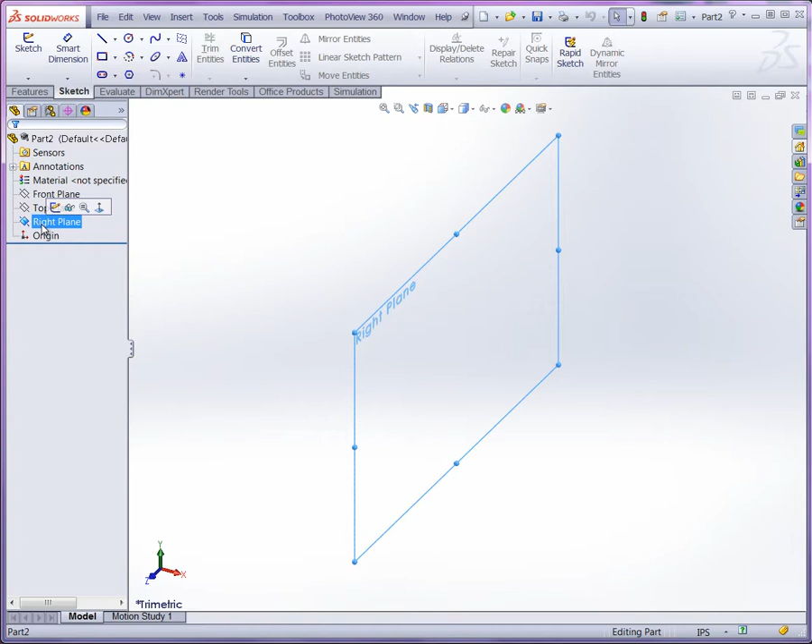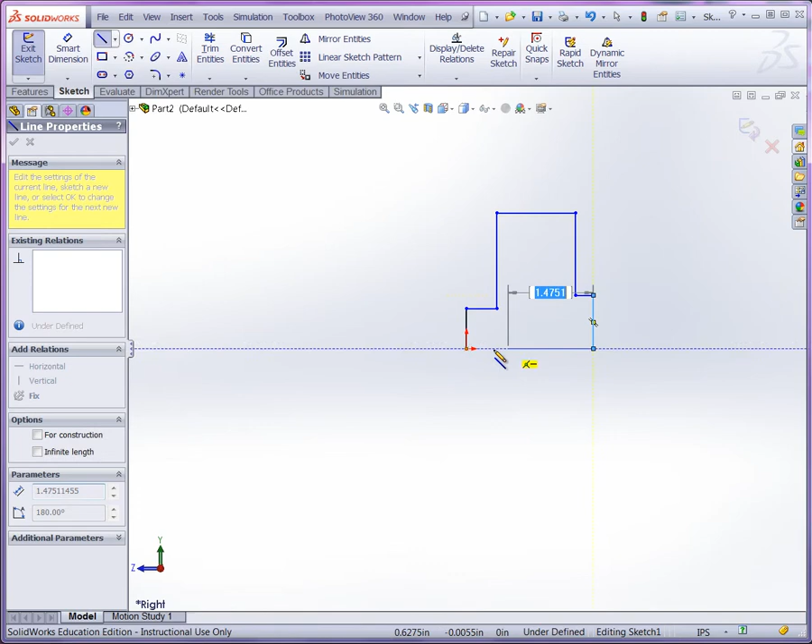Let's start by selecting the right plane and creating a sketch. We're going to use the origin here as the bottom front face reference. So let's go ahead and sketch out our rough profile. I'm just going to sketch something here and then come back and use our smart dimensions. So we'll close that up there.

So we're going to start with the overall height. We'll set that to 2.05. Now we'll set the width of the top here, the movable jaw, to 1.250.

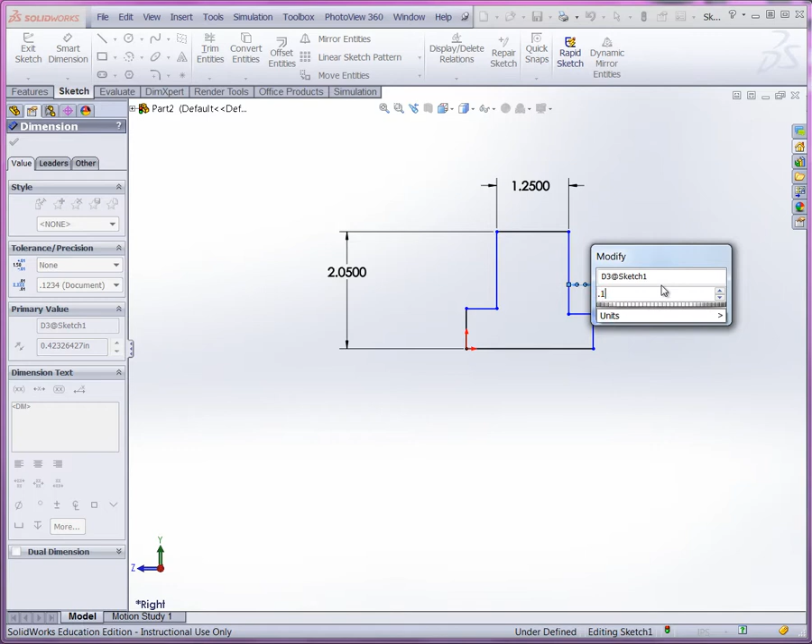Then we'll set our setback from the back face here to 0.150. And we've got a height from the top here to the back end here at 1.50.

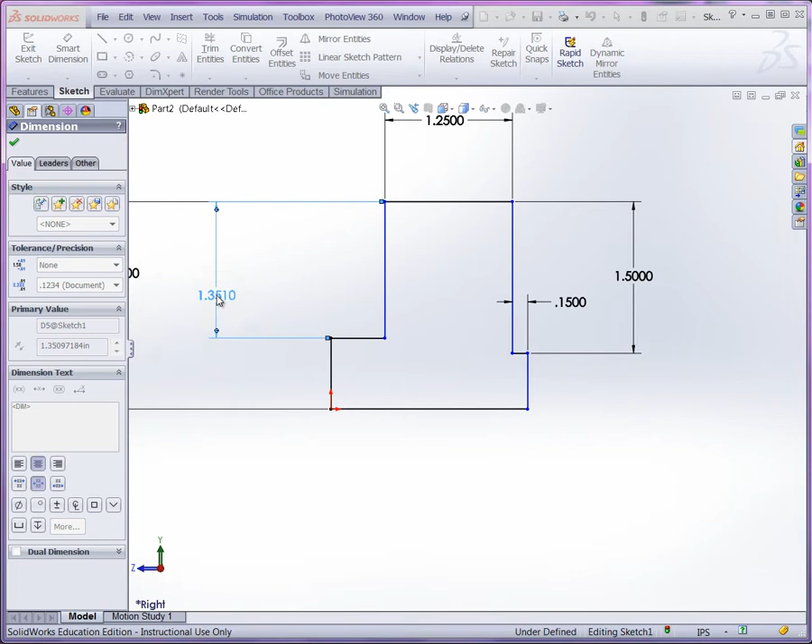And in the front we'll set our height to 1.60. Also, we want to set this setback of the front face to 0.650.

Okay, we've got a fully defined sketch, and again, this is just a rough profile of our base extrusion. Let's go ahead and do that, and then we'll continue with some additional features.

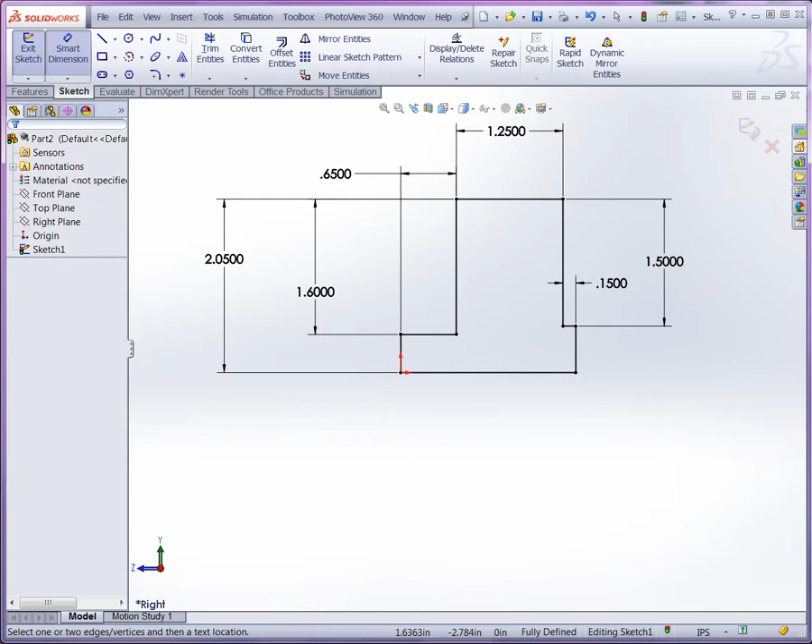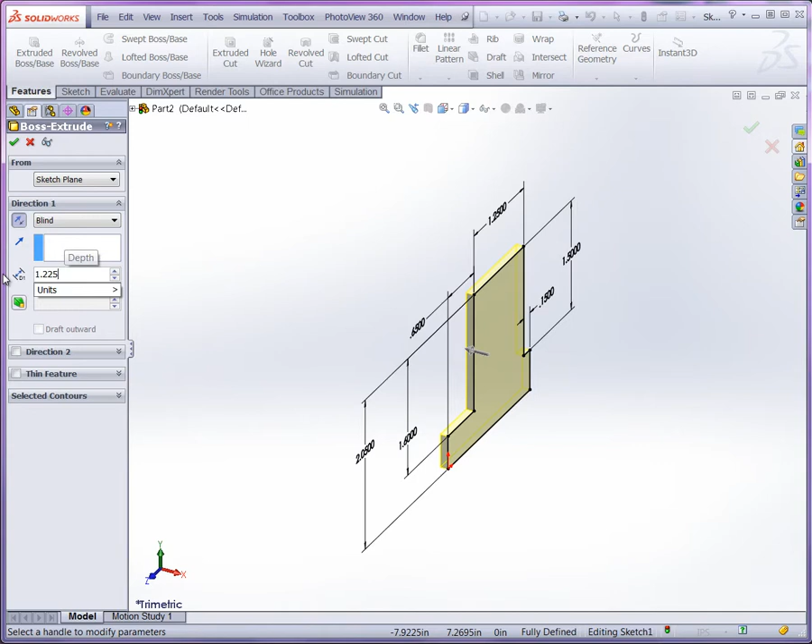So I'll switch now to features, and we're going to do an extruded boss. Again, since we're only doing half of our body, I'm going to extrude this in the other direction, and we're going to do half the width of the movable jaw, which is 1.225. So you can see here we're using the origin, and we'll be able to use the right plane when we're almost done here to mirror the body and complete the full width of the movable jaw.

Now we're going to have to remove some material from this bottom left hand corner area, so let's go ahead and prepare a sketch for that. Let's select the face here and create a new sketch. We're going to use this bottom left hand corner as our starting point, and we'll just create a rectangular sketch here.

And we're going to make it such that we use a little bit more material to cut away from this side of the part so that we can get that clearance as we go over the main body.

And we're going to set this height to 0.550, and we'll provide a total width of 0.775.

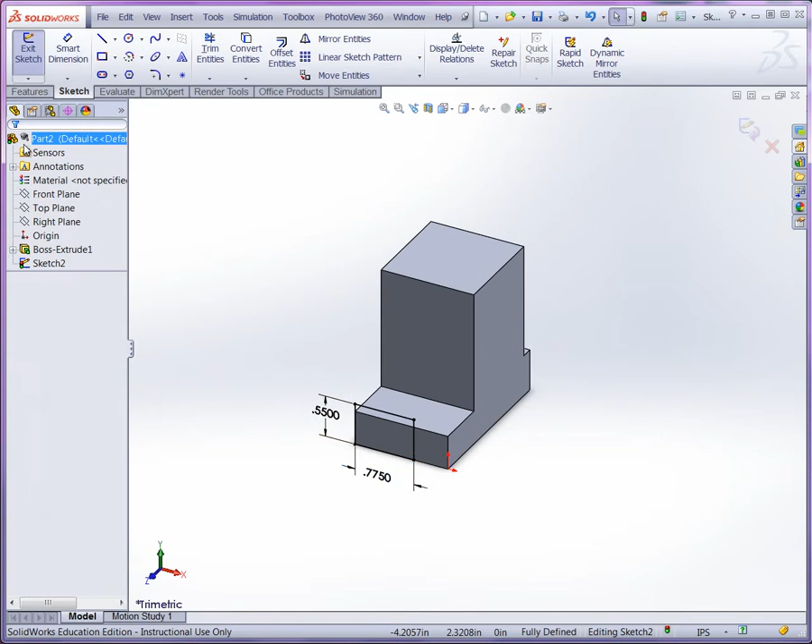And now we'll be able to go ahead and use our extrude cut feature, and we'll go through all. So you can see through the whole backside there.

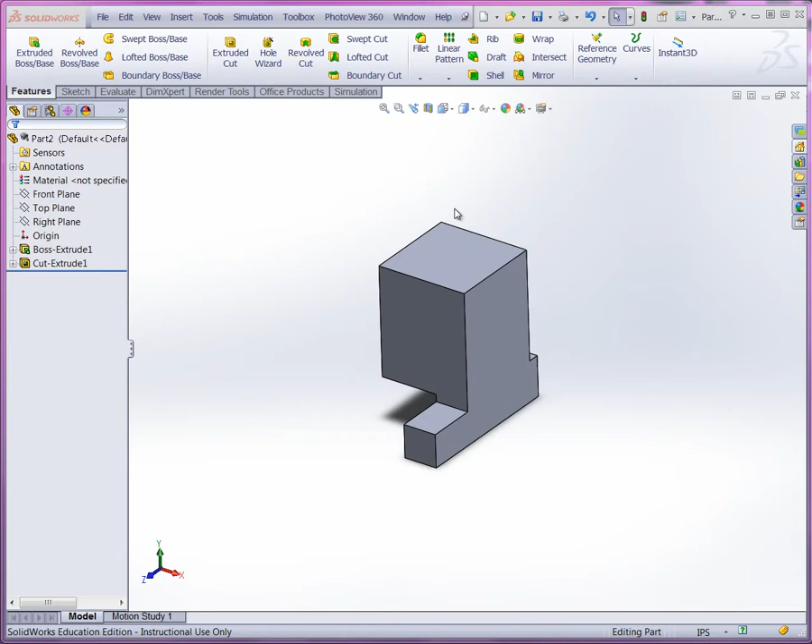So the next thing we want to do is work on this top half of the movable jaw. We want to set up a profile to cut extrude into this face to produce the sides of our movable jaw, or at least part of it.

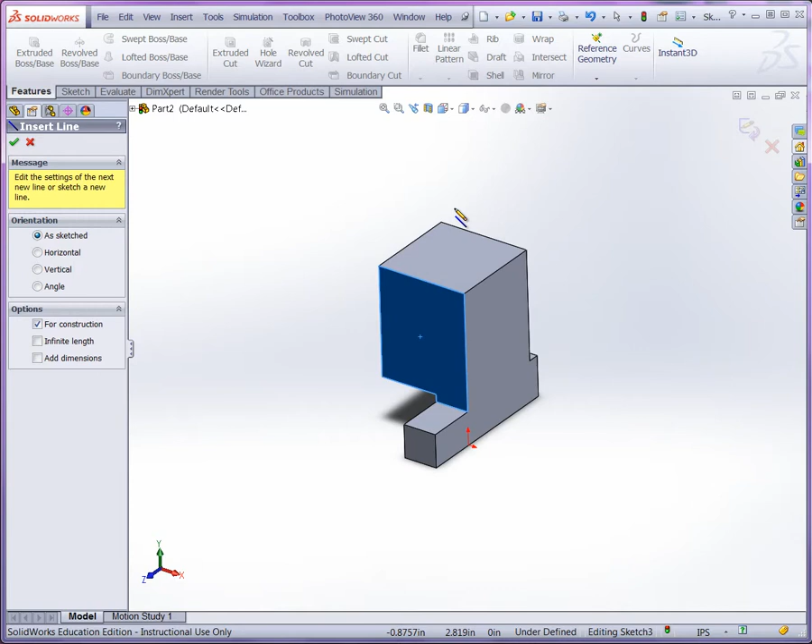So let's go ahead and select the front face here, create a sketch. Now before we continue, I'm going to set up a center line, a vertical center line here, and this will mark the center line for the arc we're going to use here to cut into this surface.

So we'll go ahead and use our smart dimension to set it. We'll set that at 0.445.

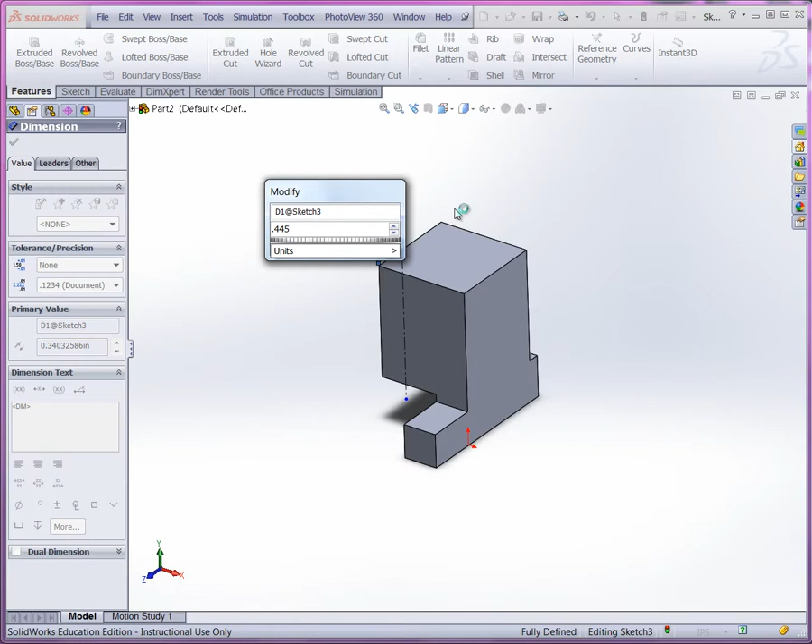Now we can go ahead and continue with the rest of our sketch work, and what we'll do here is start at the top edge and come down. We've got this side here. We'll come across and simply trace the corner here.

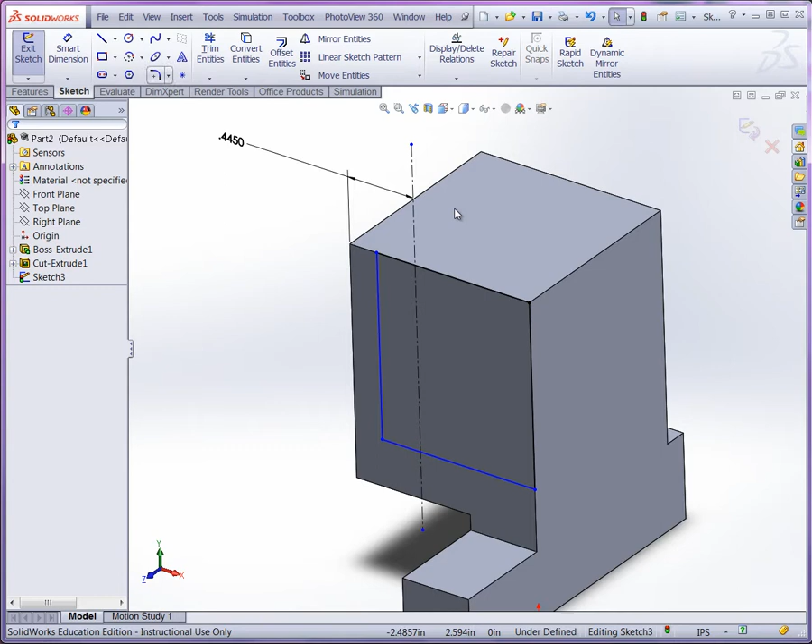Now I'll go ahead and put in a fillet radius, and we'll use a fillet radius of 0.40. We'll fillet between these two lines here.

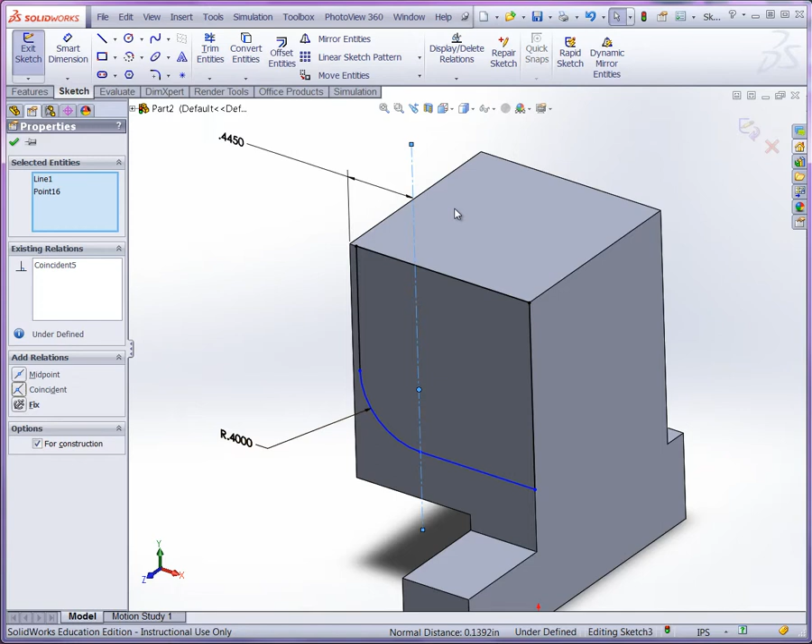Now we also have to locate this along this center line. So what we'll do is select the center and then control-click this line here, and we'll create a coincident relation. Alright, now again, as we continue here, we need to be able to show the overall width here of our edges.

So before we continue here, let's change this dimension actually to a diameter dimension, and that again should be 0.40.

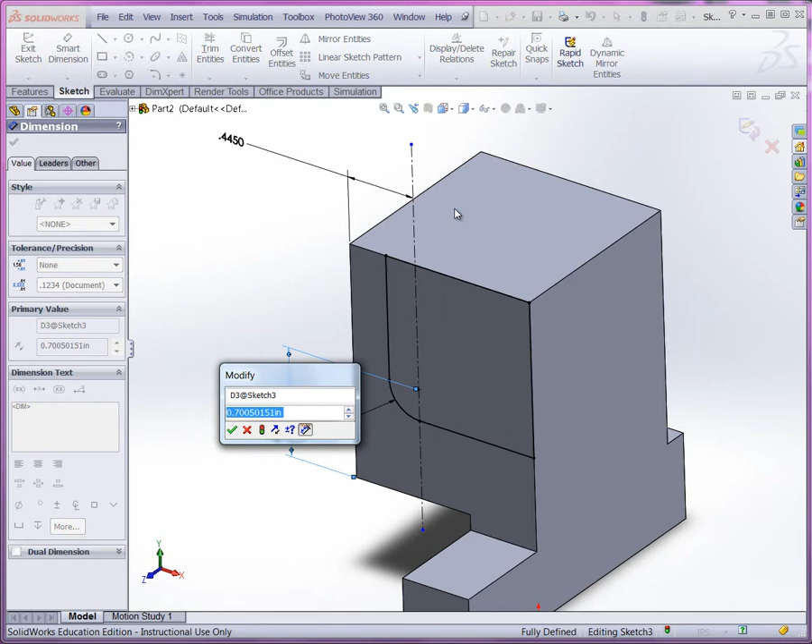There we go. And since we placed it horizontally, now let's place it vertically. So we'll go ahead and use a smart dimension again, select that center, and then select the bottom edge here and place a dimension, and we'll set that to 0.400.

Okay, so we've got our radius dimension, we've got our dimensions for the positioning. Okay, and now all we got to do is go ahead and produce our cut extrude.

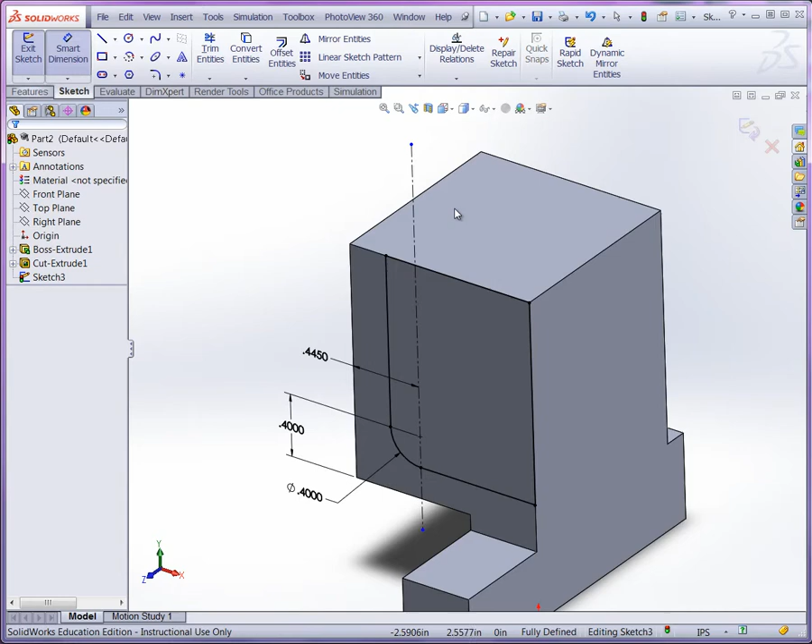So we're going to cut into this face about 0.750 to get the rough body profile there. So let's go ahead and do that. Let's go to features here, and we'll use extrude cut. We'll set that to 0.750.

There we go. Now we're going to be able to create the middle part here as a loft. We'll go ahead and see how we're going to produce that in just a moment.

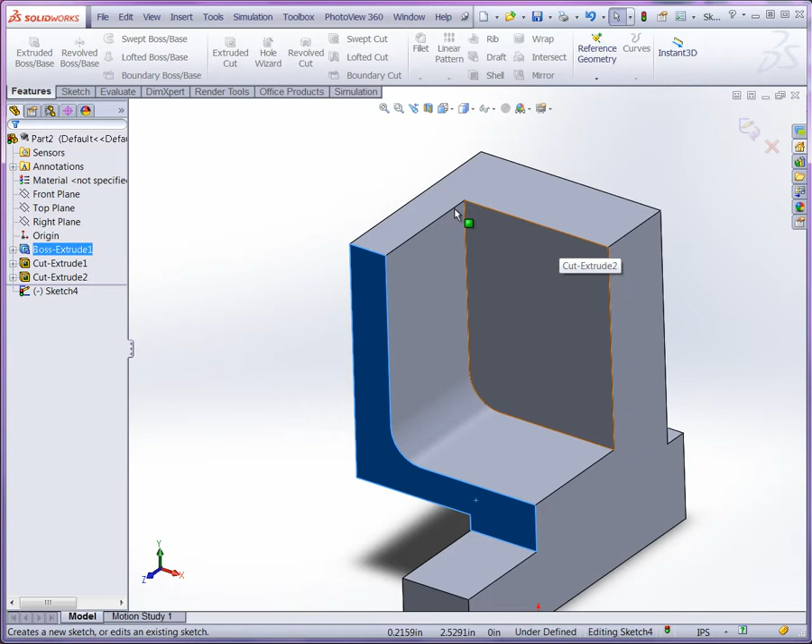So we'll start this by selecting the front face here and creating a new sketch. The next thing we want to do is create the other half of the radius profile here that will angle and blend with the other top radius profile, and then loft toward this offset back face.

The way we're going to do this is, first let's create a couple of sketch lines here from the back face, using convert entities. So we got part of it right there. Next, we'll create a circle based on the center point here with the same dimension, so it's 0.4.

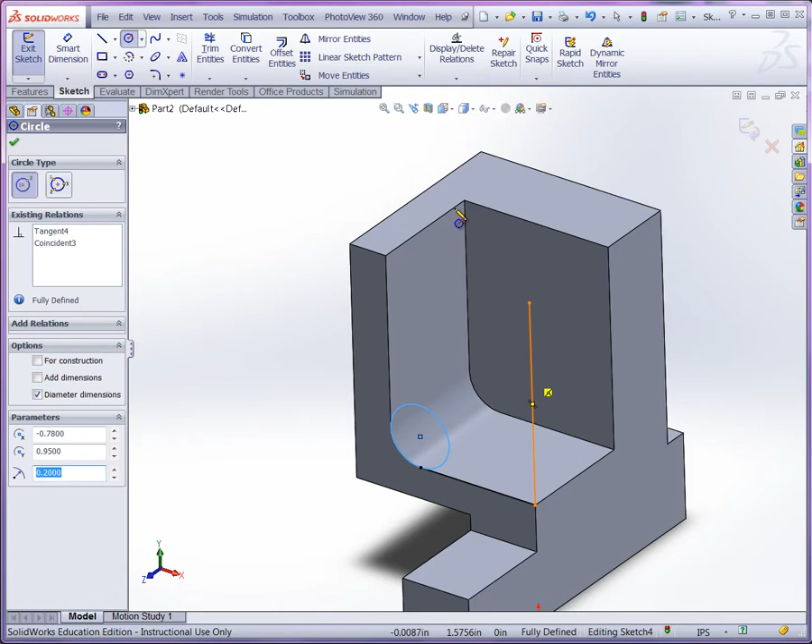Then we'll set another sketch circle along this edge here, and set that one to 0.90 diameter. We'll set its position vertically from this edge to its center at 0.60.

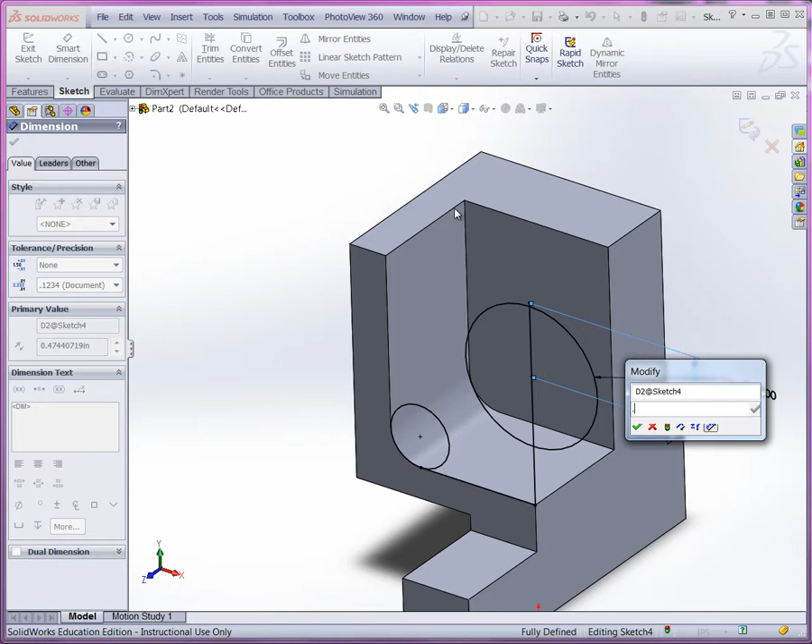Now the next thing we'll do here is trim up our line work and close our profile. We'll do that with a straight edge here.

Since these two circles are already positioned, we'll control click this edge and then control click the circle, make a tangent, deselect, control click again, control click the circle, and then finish with tangency there. Now we can clean up all of our line work.

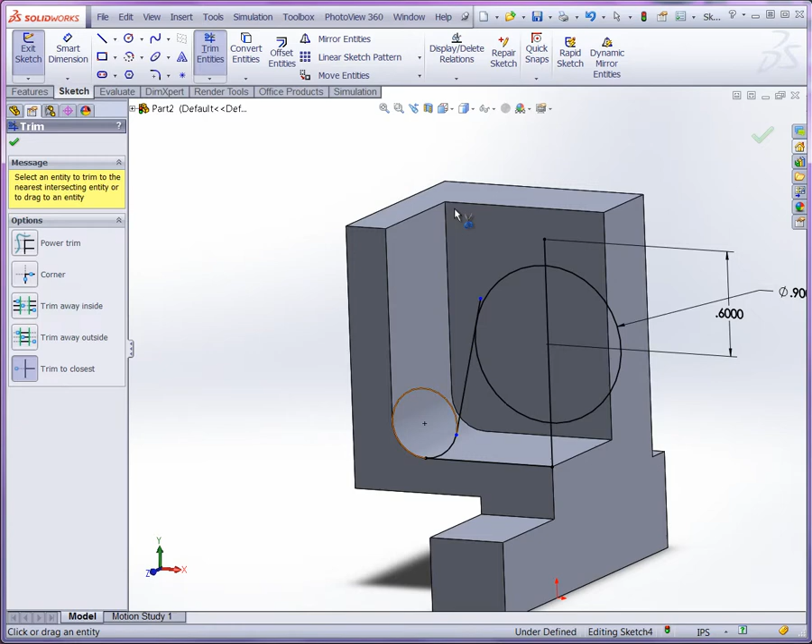We're going to use trim here and make sure we clean up the line work on this edge too. We don't want any extra extensions. Okay, there we go, there's our profile.

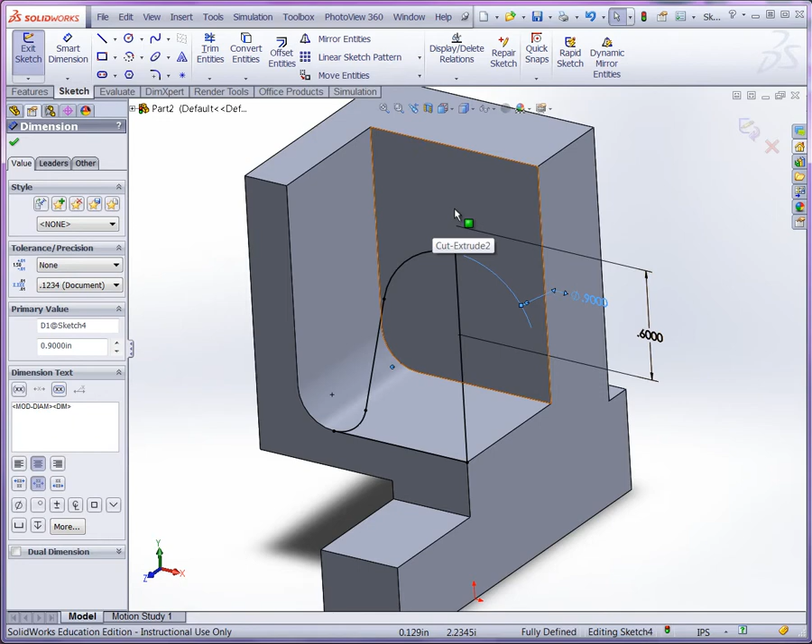This is our first profile that we're going to use for our loft, and we're going to blend this with a profile that we're going to locate on this face. So let's close that sketch and start with the next one, selecting this face and creating a sketch.

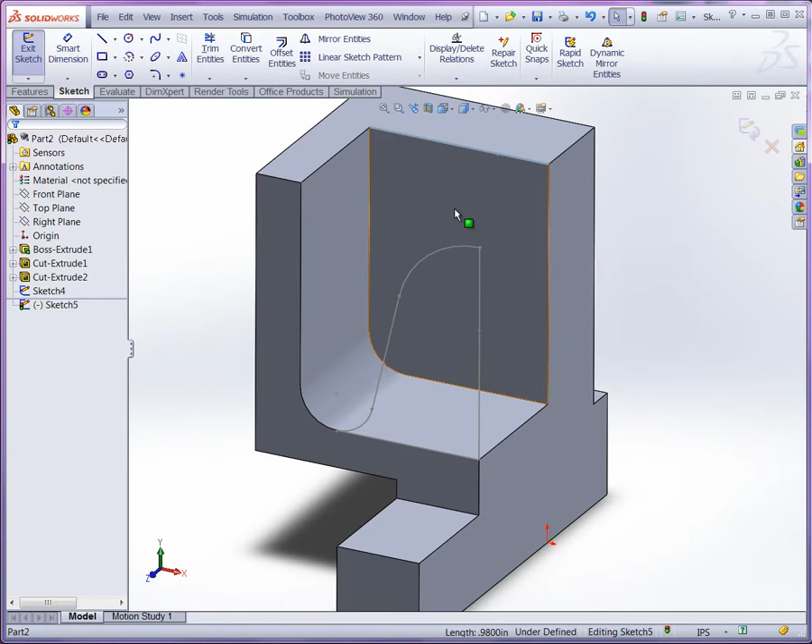Now we're going to blend part of this profile into this face. One way to do that is to reuse these edges, so control select the edges and convert entities.

Now what we'll be able to do is project this sketch arc here and this sketch edge here onto the back face in our current sketch, using convert entities once again.

Now all we have to do here is extend this edge, and this is the place where it's going to blend in - our loft is going to blend in with this back face here. So now we can clean this side up too.

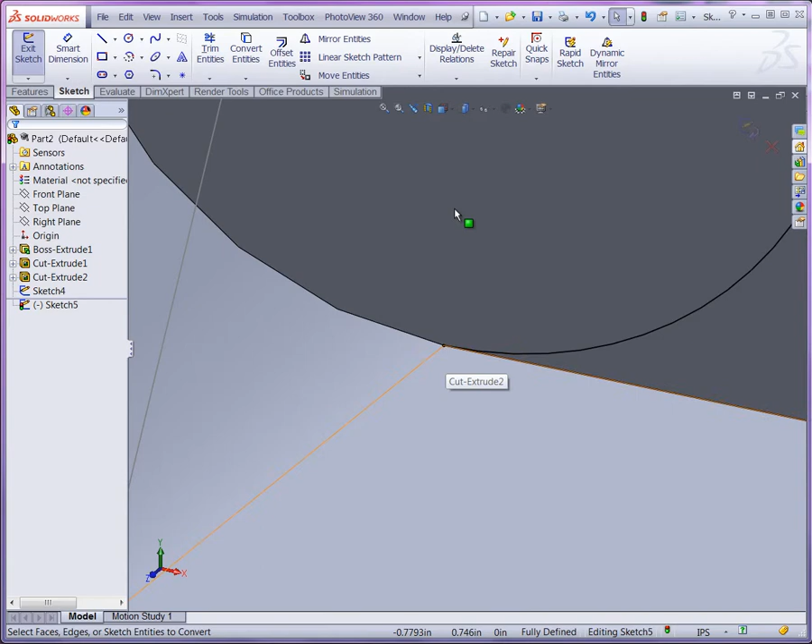So we have our top edge, our side edge here, the bottom edge, which again we can use convert entities, and that should complete our profile. Let's double check to make sure we have no extensions there. So we reused a couple of these edges and projected them onto this face in a new sketch.

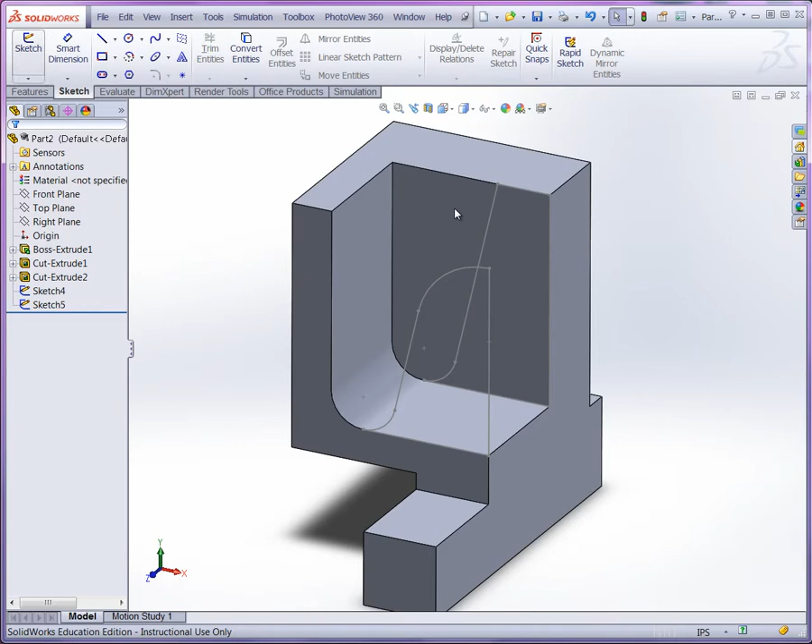Now we'll be able to create this form with loft. Let's close the sketch, go to features, and start with lofted boss base. We'll start with the front, and the next sketch to loft to will be the one in the back. As you can see, there's our form - exactly what we're looking for - and we'll go ahead and accept.

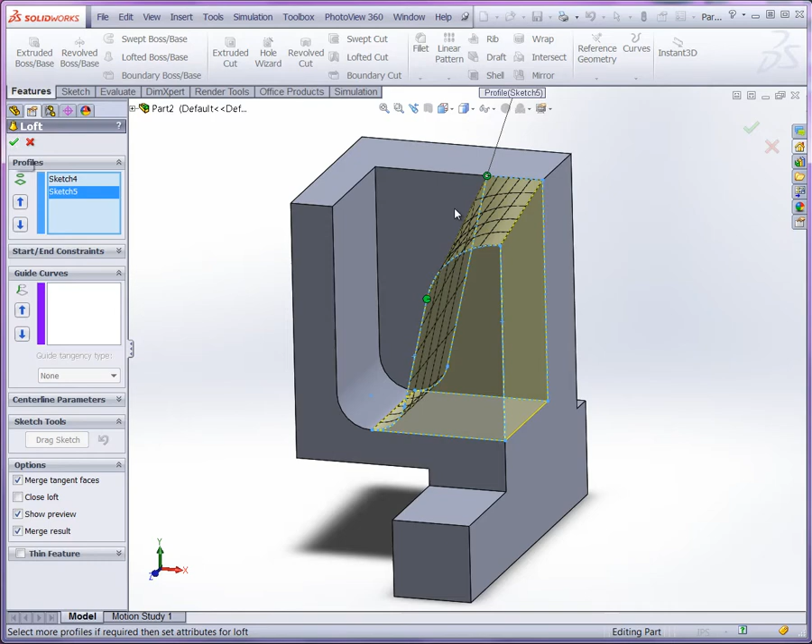And now there's our surface. Alright, let's continue with the next feature.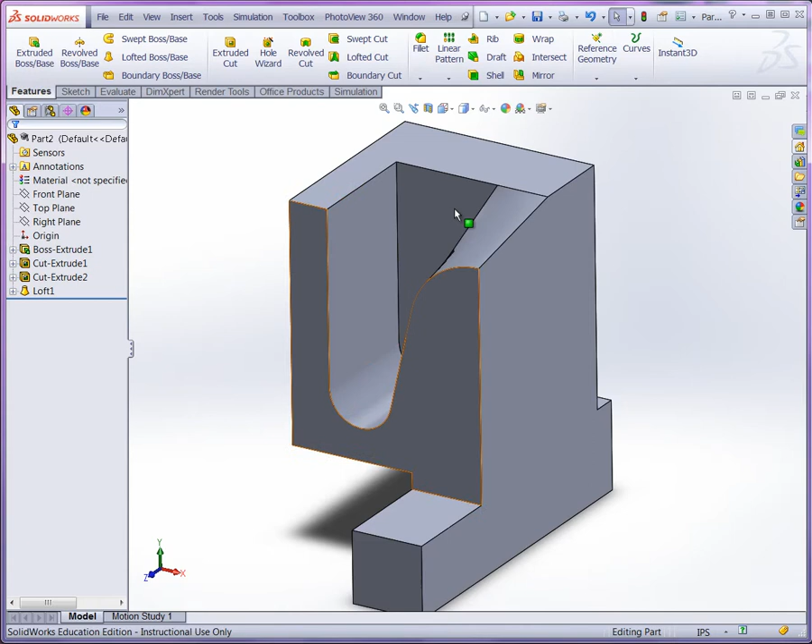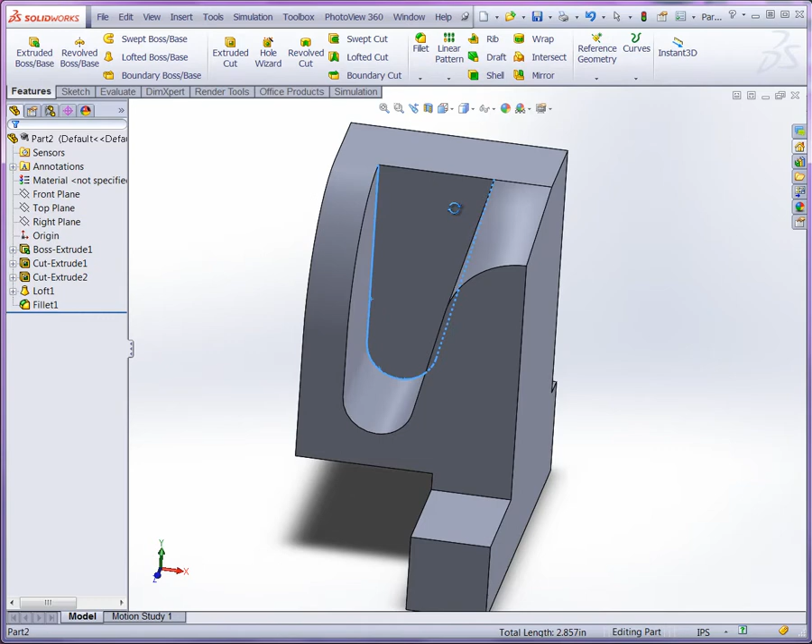Now we're going to take a look at this edge here and the inside edge of our cut extrude with loft feature. Let's start with this edge and use a 0.750 continuous radius, then come into this face and use control click to select each of those edges, and use fillet there as well.

And we're going to have a 0.050 continuous radius. Alright, that's really coming together now.

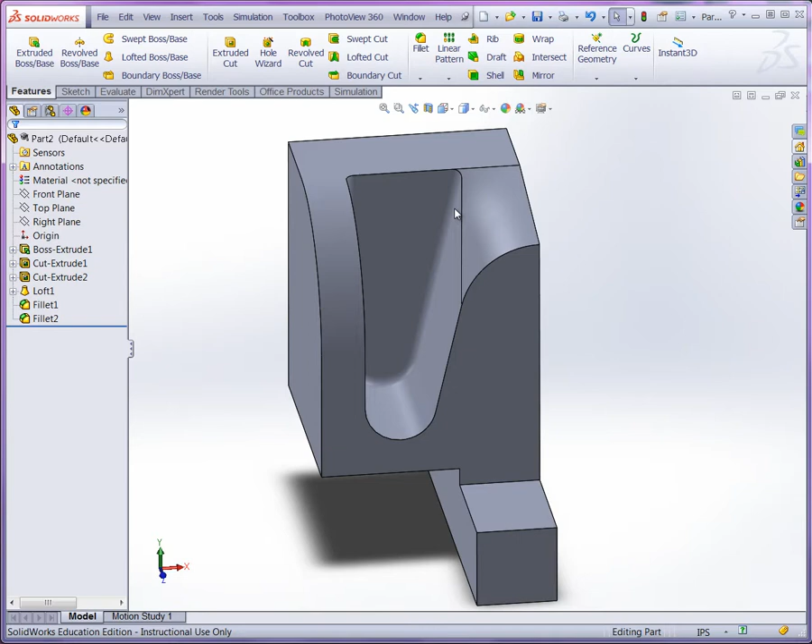Now all we need to do to complete the part is add our holes, but before we do that, let's mirror the main body. So let's start with the right plane, then control click in the design tree all of our features including the fillets, and use mirror.

Make sure that we've got all our features there. And now we've got the full width of our movable jaw.

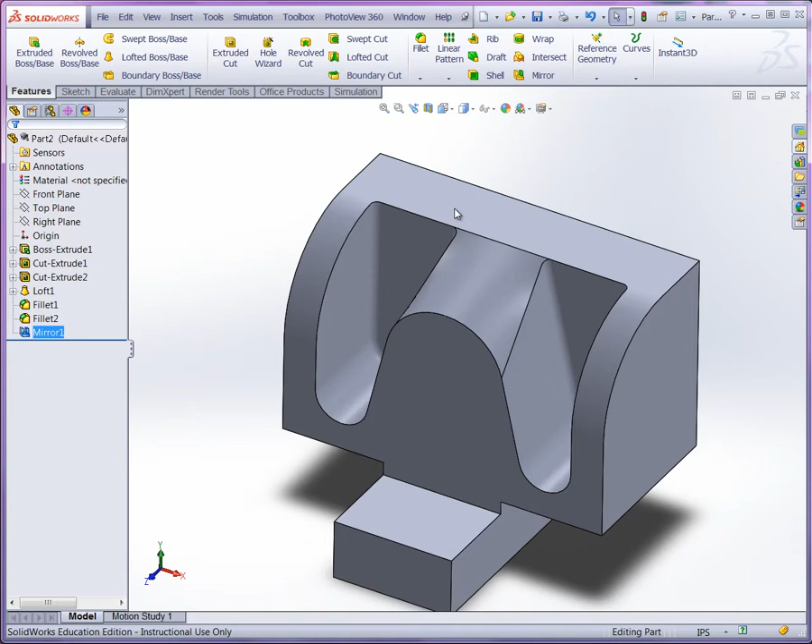So the next thing we want to do is add the sketch circles for our holes. This will make it easier to locate our holes with the hole wizard. First, let's start with the holes on this offset face. Let's select this face, create a new sketch, and if you like, get normal to it.

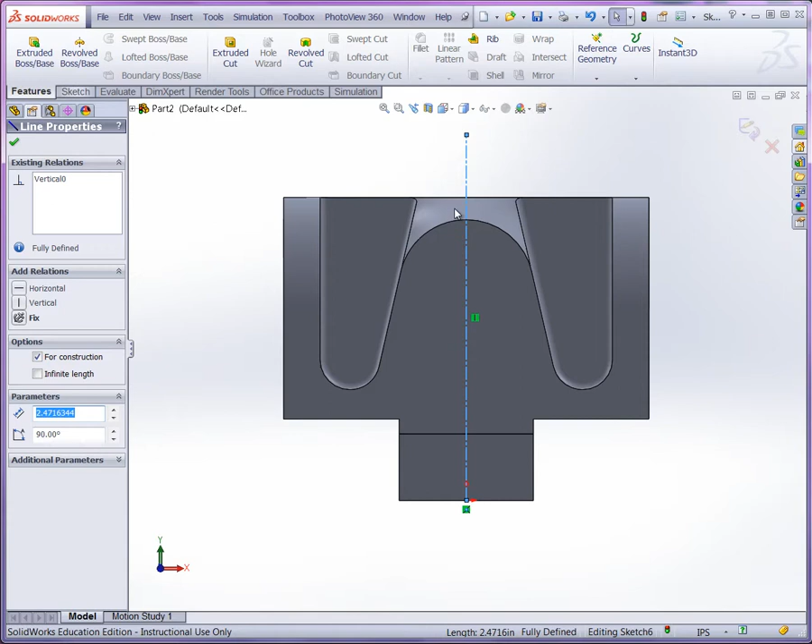We could start with a center line from the origin, and activate our dynamic mirror. Now we'll start with a circle, and use some smart dimensions here, setting the diameter to 0.200.

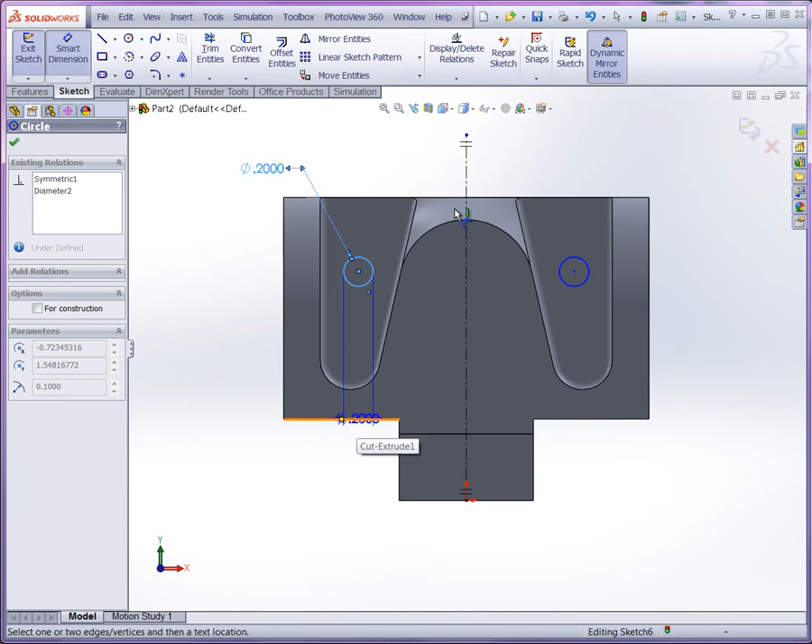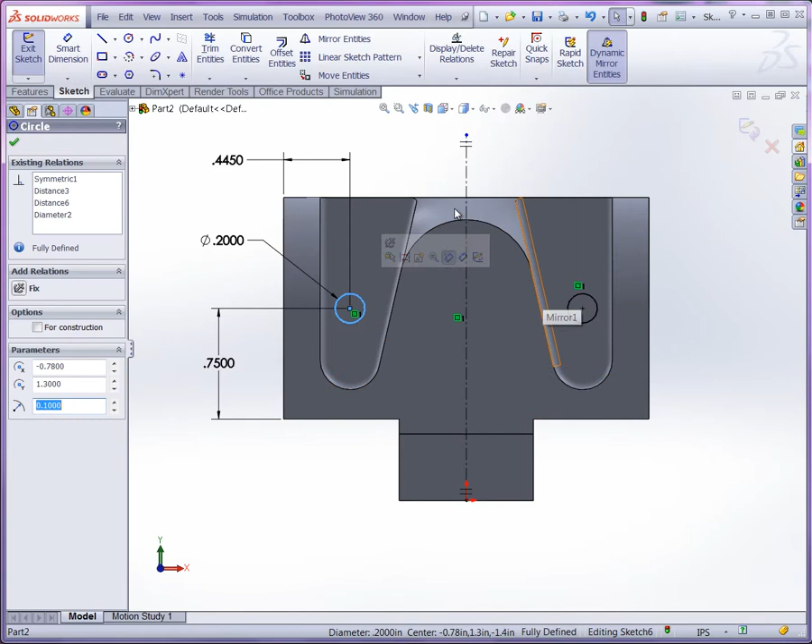Then we'll position it from the bottom of this face at 0.750, and from the edge here to the center we'll set that at 0.445. Now we're going to use these circles not for a feature, so let's select them - we'll just use them for reference. This will be for our offset face holes.

Alright, let's close this sketch, and now let's take a look at the sketch we'll use for the hole at the top of this face. I'm going to select this face and create a new sketch.

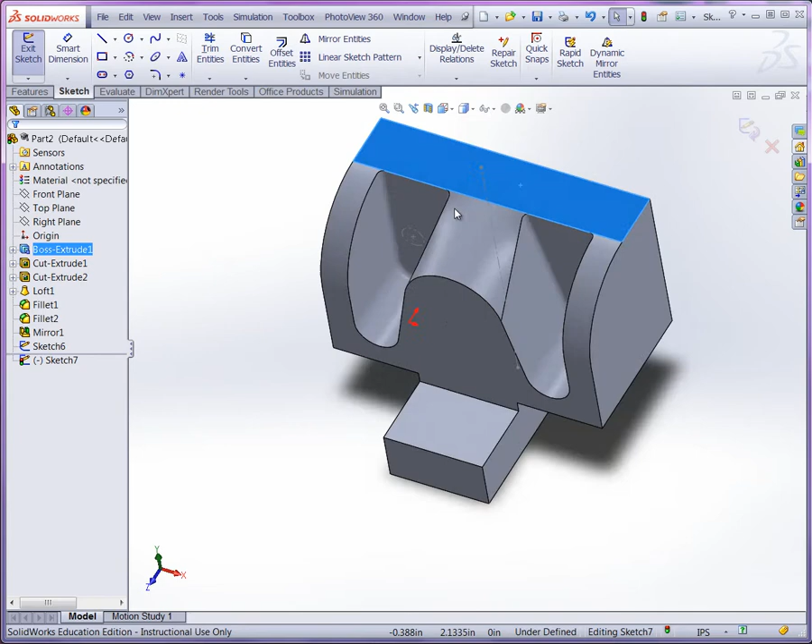If I look at it from the top here, what I'll want to do is create a center line from the origin vertically, and then use a sketch circle coincident with the line, setting the dimension for that circle to 0.250.

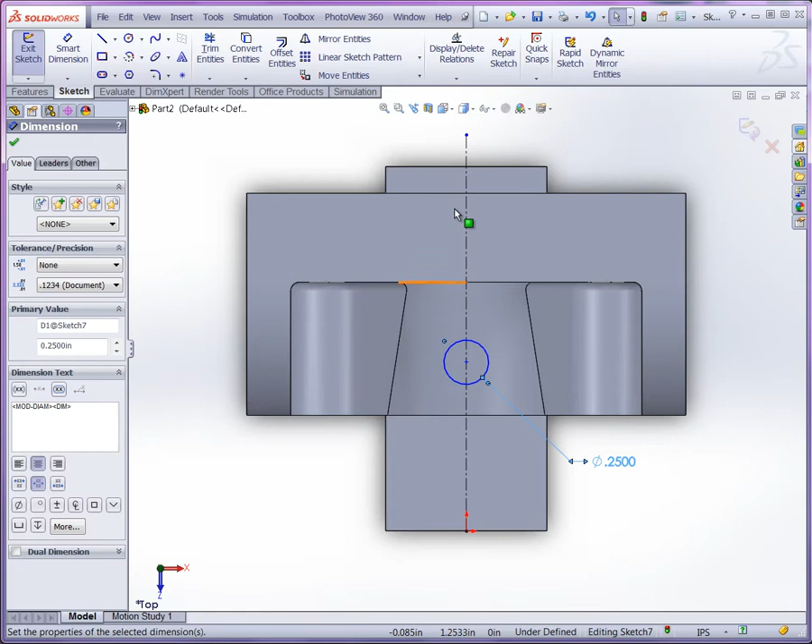And the position for that from the back face here to there, we'll set it at 0.820. And once again, we want to make that for construction only.

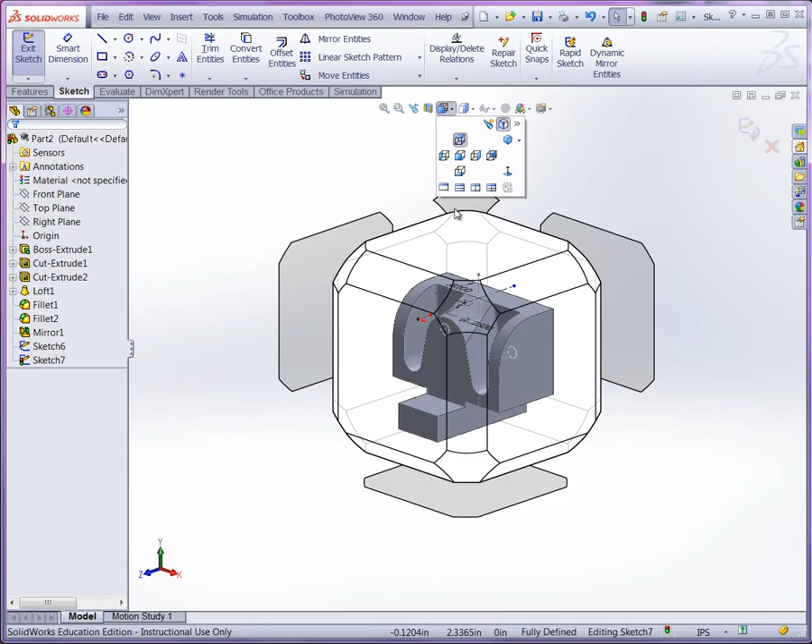Okay, now lastly we can look down here on the bottom of this base, and we're going to set the two sketch circles here for our hole wizard holes. So select the face, create a new sketch.

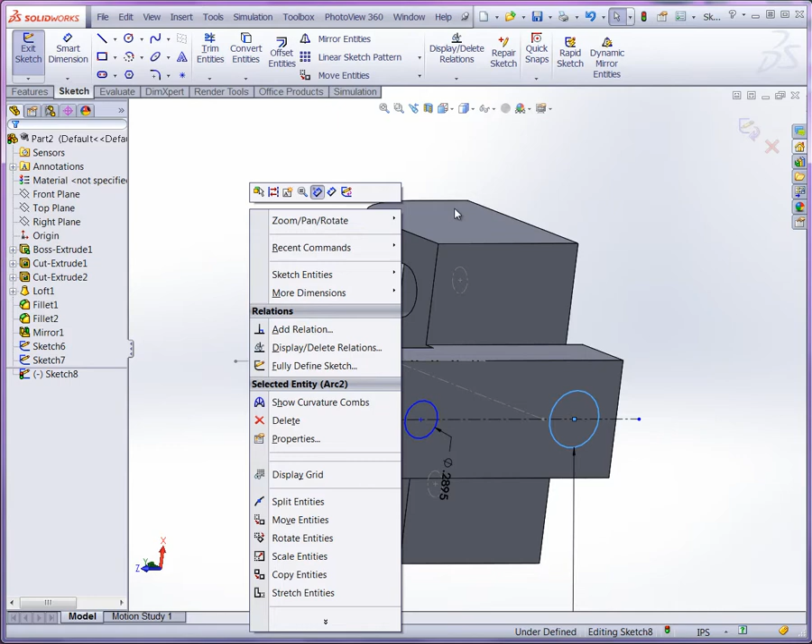Once again, use the center line starting at the origin there. We'll set up two sketch circles the same size, so I'll just sketch two here, and we'll select both of them, control click both of them, make them equal. Sorry, let's get rid of one of those dimensions. There we go. And let's get into a normal view. There we are.

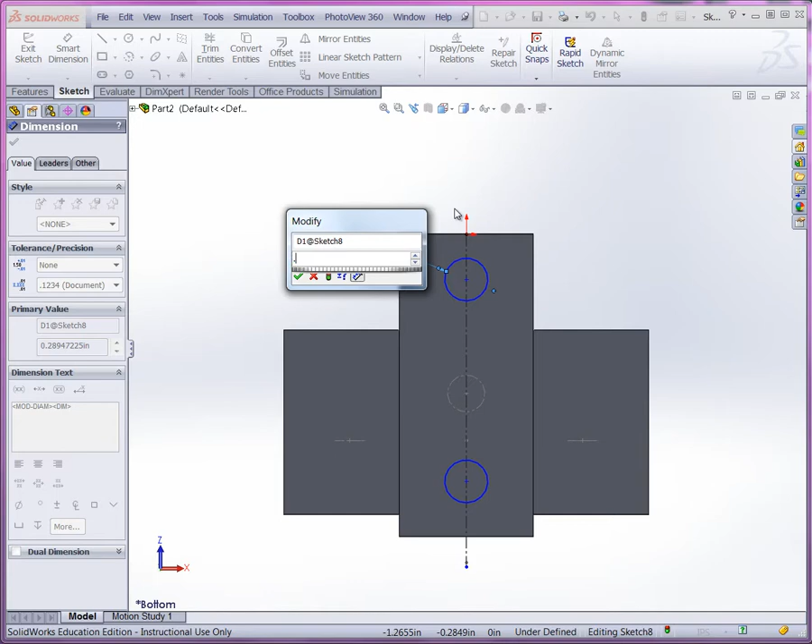Okay, we'll make this 0.250, and once again we'll select both of them, control click here, make them for construction, and then also let's set their distance from each side to 0.30.

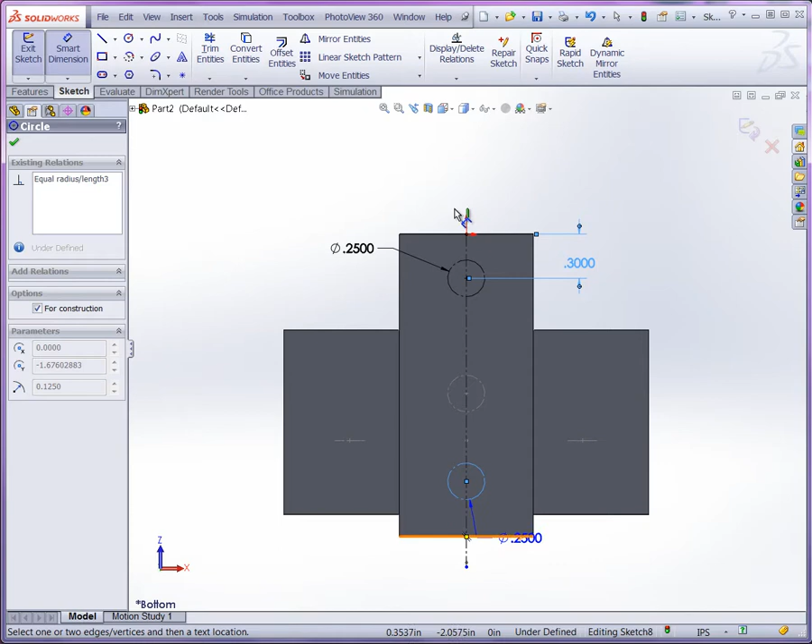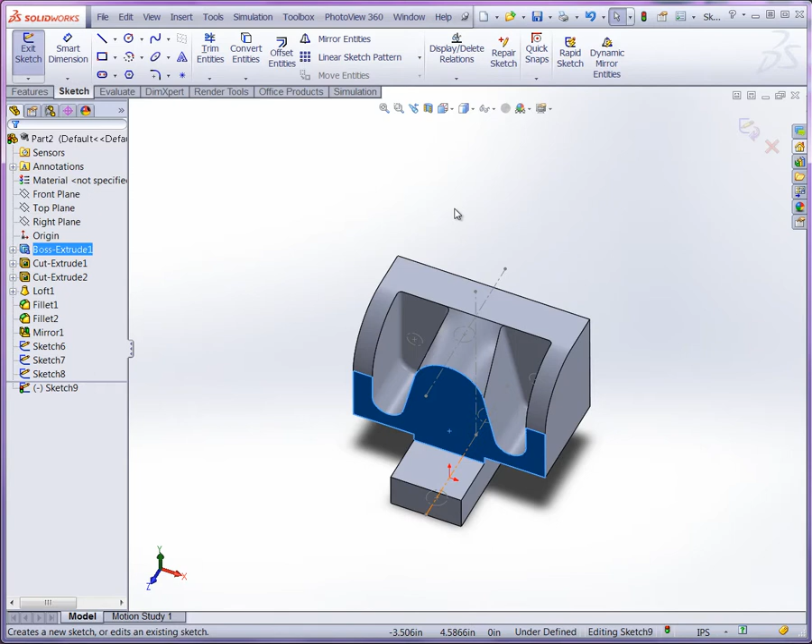Okay, so we've got all our sketch holes here, and now we're ready to create our holes. We have one more actually. We have one here on this face, so let's select this face, we'll create a sketch. Once again using the center line starting from the origin, making it vertical, and then starting with a circle somewhere here.

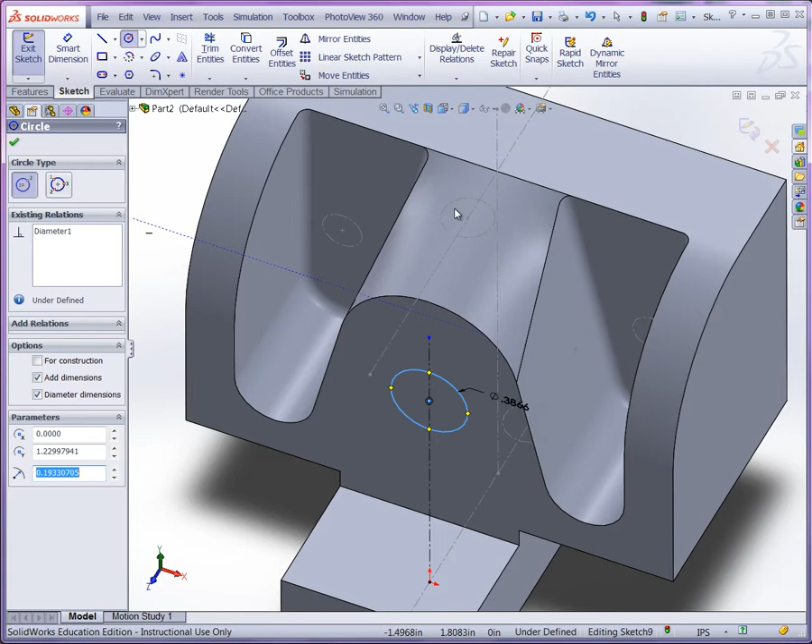Now actually, because it is concentric with our previous sketch circles, let's see if we can do that. So I'll control click the edge here, and we can make it concentric with the center point of our new sketch circle here. And we'll make this 0.400.

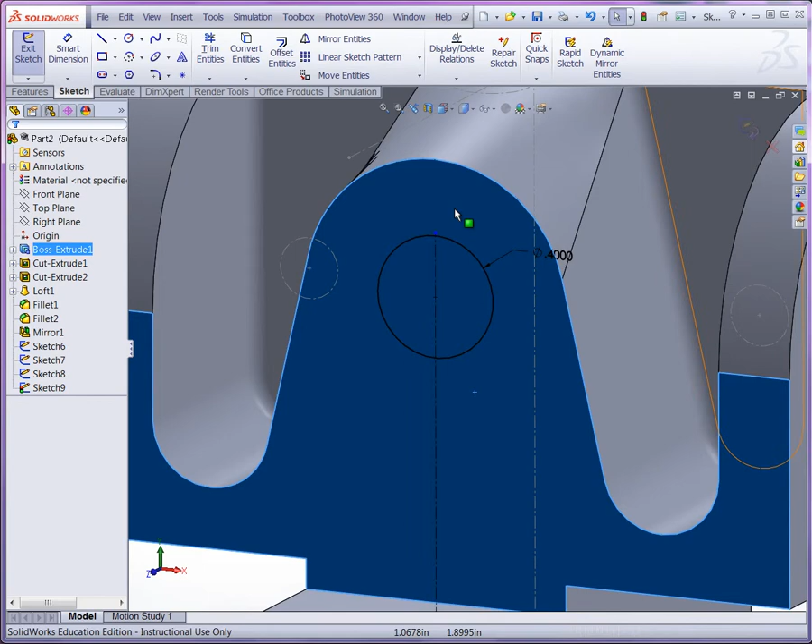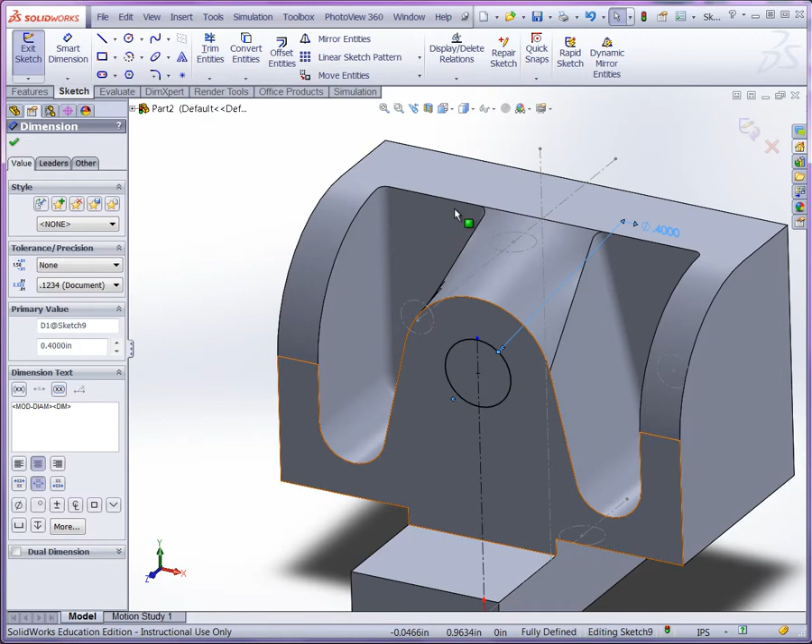Okay, so we can start with this hole here, since we're only going to make a cut extrude hole. This will be where the end of the screw fits into. So why don't we go ahead and start with this hole here and use our cut extrude, which will go into the part at 0.830 depth. Okay. There we are.

Now, using the remainder of the sketches, we'll go ahead and put in our hole wizard holes. So let's continue with the hole wizard, and we'll start with our top hole here. Let's go ahead and enter the hole wizard. We're going to start with a straight tap, bottoming tapped hole, and we're going to select 10-32 as our size. Now, our blind depth here is going to be at 4.474. We're going to show our cosmetic thread, include the thread callout, and we'll use a 2B thread class.

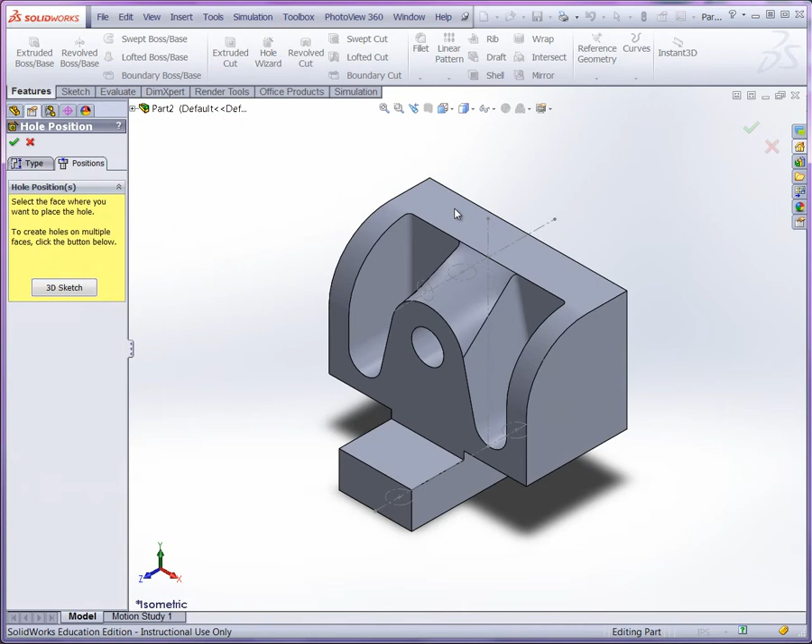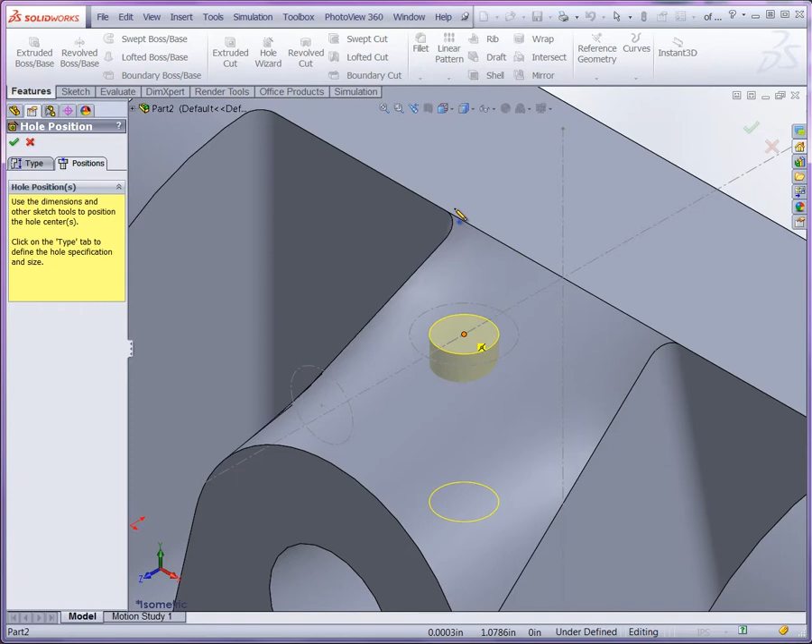Alright, let's go to positions. And now, as you zoom in here, I want you to select the top face here, or the boss extrude. Then we're going to use our sketch circle here to place it. Now you'll notice that what's happening here is that it's oriented to the top face of that extrude, and it'll drill straight down using this center mark or the center point as a reference. So let's go ahead and snap to it, and then just click OK, and then you should have your hole.

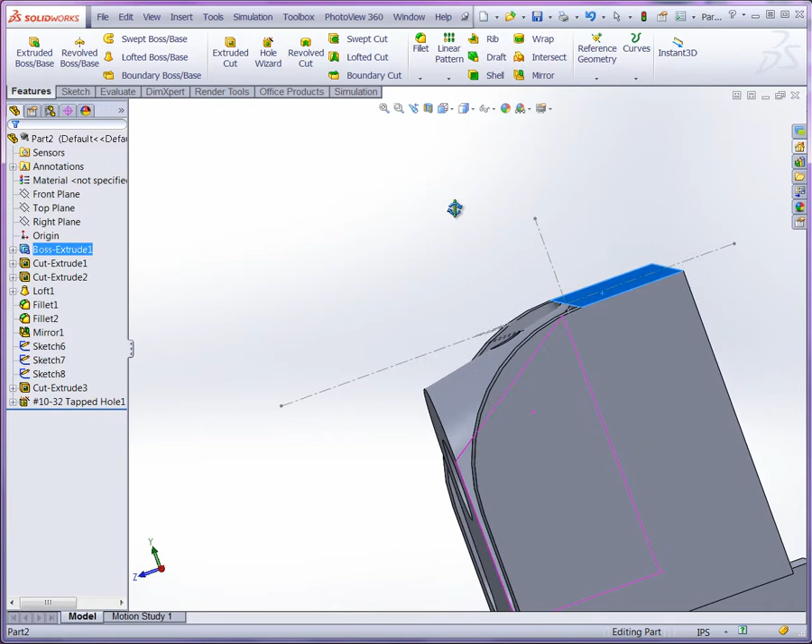You want to make sure that the hole itself is not going in at an angle. And I know it's kind of difficult because this is a sloping face, but remember, we use this face here, this plane here, to orient the hole. And then we use our sketch circle here to locate it.

Alright, let's continue with the offset face holes here. Now for these holes, we're just going to use a simple hole. Let's go into the hole wizard. We'll just use a simple hole here, ANSI inch, size 10, and we're going to go through all and switch over to positions. Again, we want to select the face first, so let's select this face and now use the sketch circles as our reference and select those two positions, then click OK.

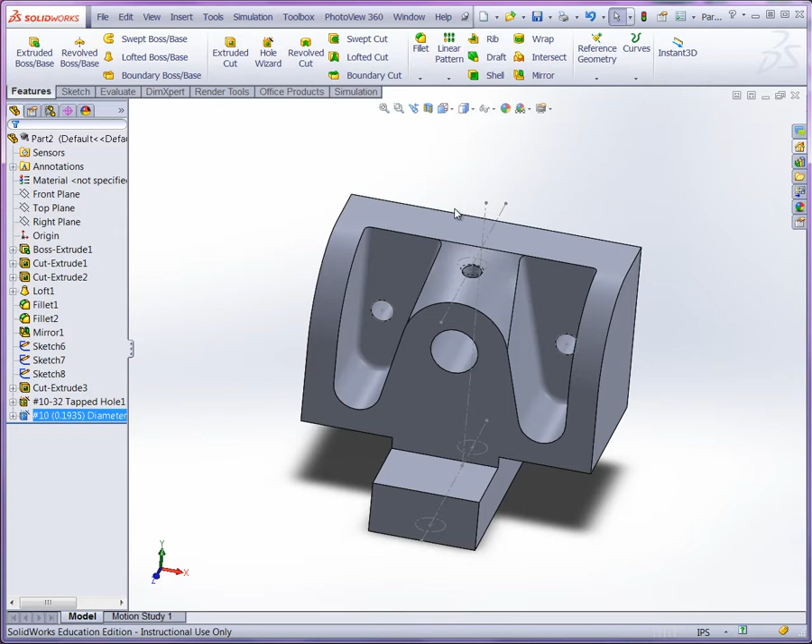Next, we're going to take a look at the bottom here, and while we have two of the same holes, we have slightly different end conditions. Let's start with the front here, the front end here. Let's enter the hole wizard. Again, we're just going to use a simple hole. We're going to use 1/4 inch size, and we're going to use through all as the end condition.

Let's switch over to positions. Again, selecting the same face on the bottom here. We'll go ahead and place the hole and click OK. Now let's return once again to the hole wizard, except this time for our blind end condition here, we're going to use 0.560.

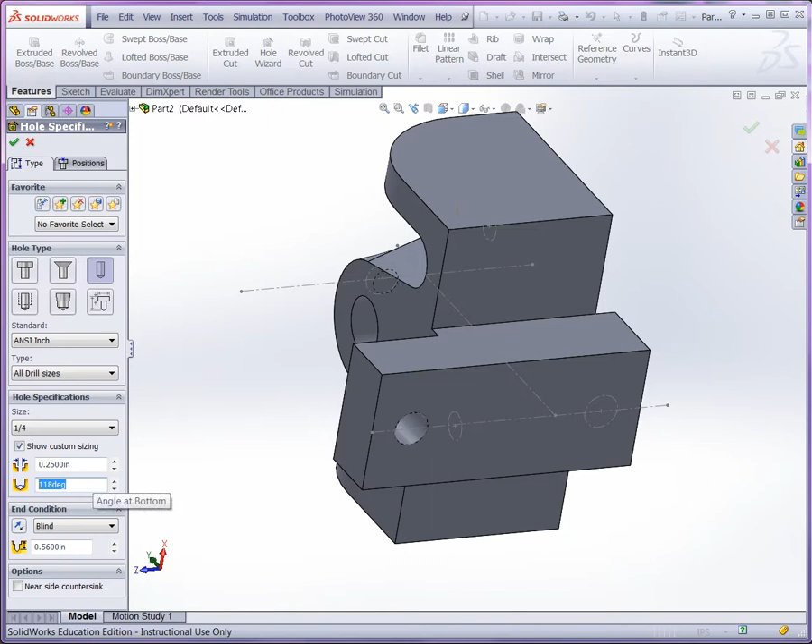Okay, now if you look at the custom sizing here, you can see how we can change the degree angle here. We'll go ahead and just leave it as is. And now we'll switch over to positions, selecting the same bottom face here. And then with the help of your sketch circle here, we'll place that hole and then click OK. Alright.

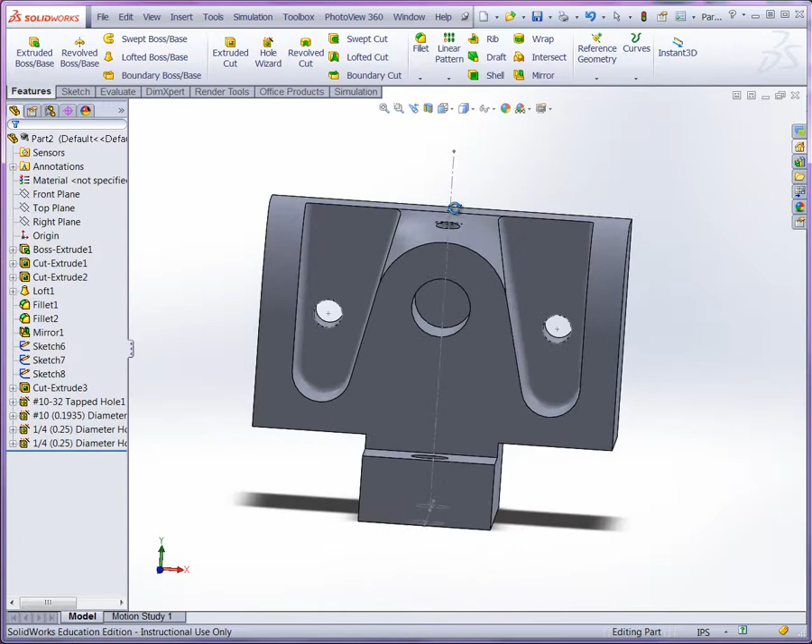So now, as you can see here, we've got our completed movable jaw. You could add whatever materials are specified and color the part as you wish, and prepare for the technical drawing views as well.